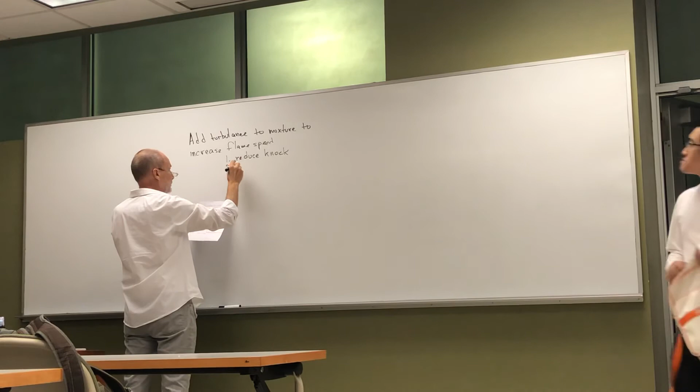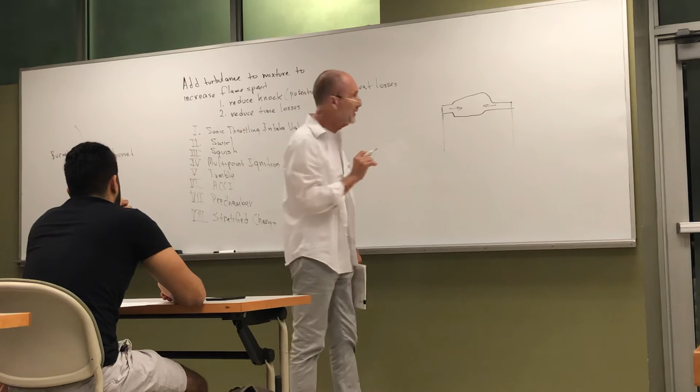This will be quantified, but right now, just in terms of the bulk gas motion, can you see that when a piston comes up and this space goes down to a very small volume, the gases that were here are forced into the main chamber. The rate of decrease in area here is going to be greater than the rate here. And so the gases are going to be forced from this space to that space, and that's squish. This area, here in the cylinder head, is the squish area.

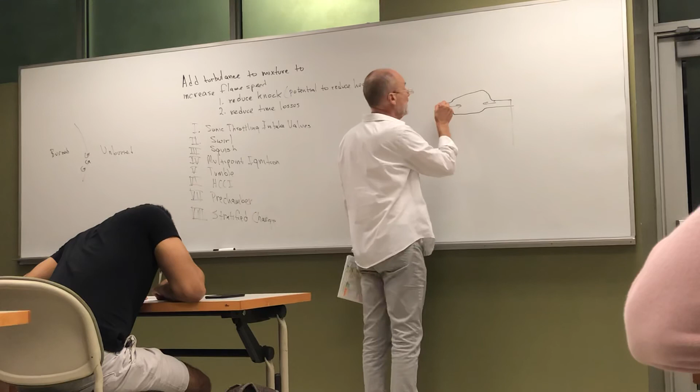And then the part in the middle, that's the main chamber. Pardon me? The part in the middle is the main chamber. Yeah. Once this is at top dead center, then we have the combustion chamber at top dead center. The piston moves up to this position, at top dead center. And this space is the clearance volume of the combustion chamber.

And the gases that were in here have to be forced into the main chamber, and that adds a lot of turbulence. How much turbulence we'll see later down the page, but you can see how forcing the gases from this position to this position, anytime we force gas motion in the chamber, we're going to introduce turbulence.

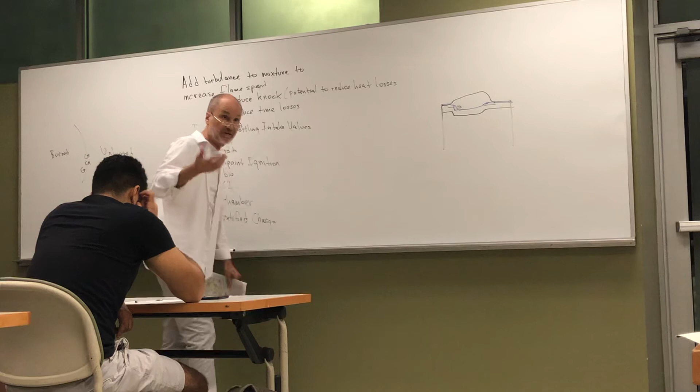So those two methods, squish and swirl, are completely dependent on what shape we have the combustion chamber, the cylinder head and the piston. As we vary the shape of the cylinder head and the piston, we can vary the swirl ratio and the squish tremendously. On the engine downstairs, we went from 0 squish to about 38% or so. And we went from a swirl ratio of about 0.5 to 3.

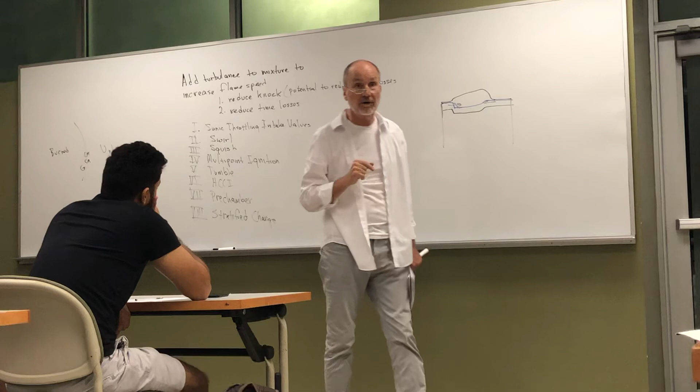How do you quantify that? Pardon me? How do you quantify squish? The squish is quantified by the area, the percentage of the piston that you cover. 39% squish area means that 39% of the piston is covered by the area that comes within 40 thousandths of an inch. The squish area is that area in which the piston and the cylinder head approach one another within typically the thickness of the head gasket, which is typically about 40 thousandths of an inch.

Okay, so 40 thousandths is the standard for squish? Well, typically, the piston comes all the way up to the top of the cylinder block, and this part of the cylinder head is machined flat because it's economically the easiest way to make the cylinder head. So you make up the squish distance by the thickness of the head gasket, and they are typically 40 thousandths of an inch, but you can get them, 120 thousandths. You can buy special order head gaskets at any thickness that you like.

You rarely see something under 20 thousandths. It gets more and more difficult as you make the head gasket thinner and thinner to make sure it seals, because it has to somehow take care of any irregularities in the two surfaces. And so it needs a relatively large percentage of its own thickness to make that difference.

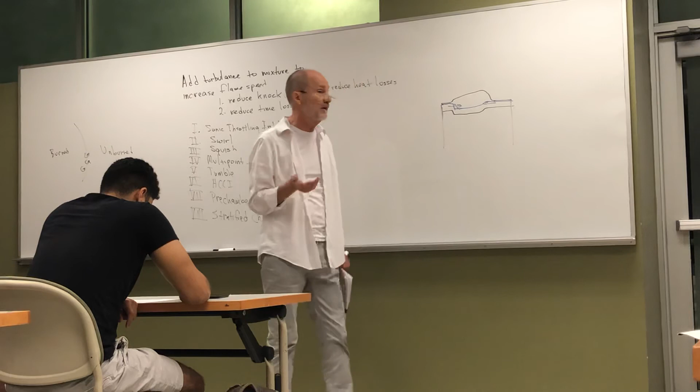What about like O-rings? Use O-rings, but they're very expensive. They're not used in production engines. High-performance engines use O-rings, diesel engines may use O-rings, but normal spark ignition engines, they're too expensive.

An O-ring just means that you put a groove in a cylinder block and you place either a metal or, in some instances, a non-metallic ring in there to seal. Then when the cylinder head bolts bolt the cylinder head to the block, you have a very small area to resist all that pressure, and you get very high pressures and a very good seal. But it's expensive, so it's not used.

So if you were able to pretty much have a port come straight out the top, that would be little to no swirl, and then the more cross flow is. Exactly. As we look at the cylinder block from the side, here's the intake. The farther it's laid down in this direction, the more swirl we're going to get.

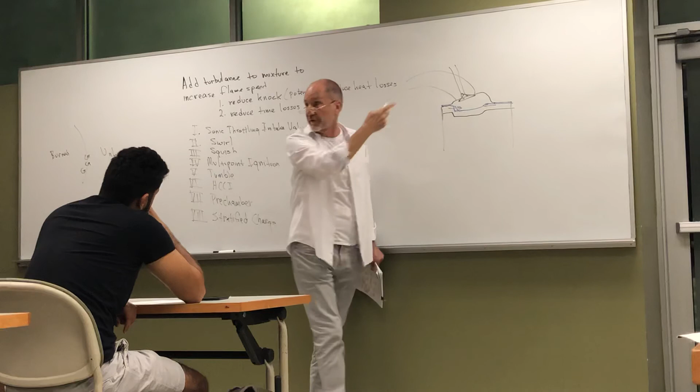Now, what we did with the engines downstairs is, as you look at the combustion chamber from the top, here's the intake valve. We have the port come in like this, and then this side of the combustion chamber goes down. The valve is recessed up into the cylinder head, but the combustion chamber goes all the way down to the squish area on this side, so you prevent the gases from going to that side. When the intake valve's open, they're blocked by part of the combustion chamber. And that's how we got such a high swirl ratio, and how we were able to eventually run lean enough to meet emissions without a catalyst.

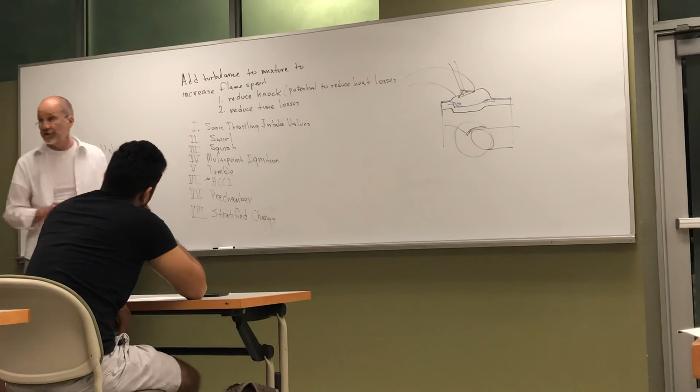And that's one of the goals here, certainly possible with homogeneous charge compression ignition, but for decades, ever since the 1970s when they started to use catalysts, the intent is to find some way to run lean enough so that you don't have to use a catalyst most of the time, entirely over the federal driving cycle. Are you virtually reducing the displacement by adding so much squish, or only increasing the displacement?

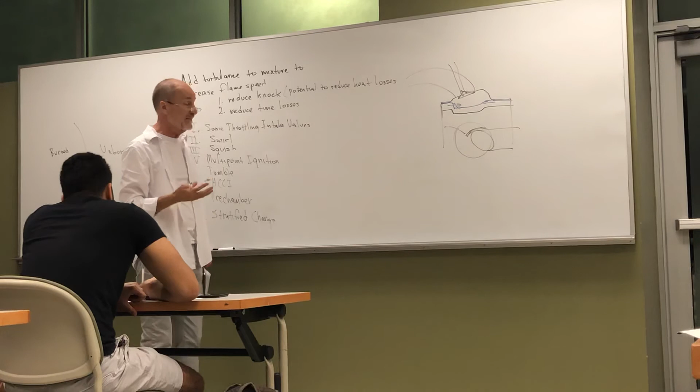The displacement is only a function of the bore of the cylinder and the stroke. So you're increasing compression ratio, that's what it is. Yeah. And then you have to remove a little metal someplace else if you want the same compression ratio, which is what we ended up doing. So you end up with a taller chamber and then narrower. It depends entirely. You can sink the whole chamber into the head if you want to. It depends on where the metal exists in the existing head. If you're casting your own head, then you're free to put it wherever you want to.

Where else is it usually removed from if you're not making it taller, if you want to lower the compression ratio? Yeah, it's going to keep the same compression ratio, but add squish. You have to look at the particular engine to see if there's metal. If it's a true hemispherical combustion chamber, there's really no metal available to add squish. In our case, we started out with a chamber that had a reasonable amount of squish, and then we machined it all the way to the zero squish situation. And then we ended up with the final chamber, we were adding it by cutting the thickness of the cylinder head. And this is at an angle here, so when you plane the head, these distances get thicker.

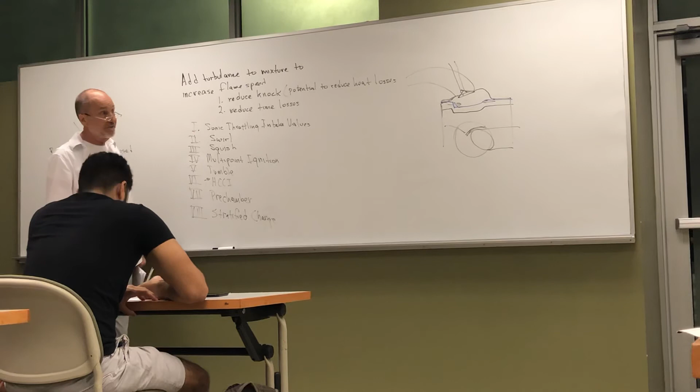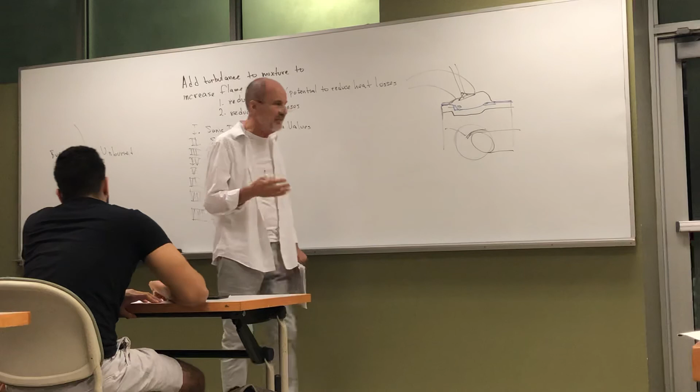But there's a limit with a given casting as to what you can do. That's why we ended up with a Mazda cylinder block and a Kia cylinder head, because there weren't any Mazdas that we could find that had metal in enough of the right spots where we could do machine work only without welding. And welding becomes very cumbersome. Heads change shape when you weld. Whenever you put a large amount of aluminum welded into a spot, as it cools, it shrinks and pulls all the metal around it and warps everything. So you'd rather try to pick some block of aluminum to make a cylinder head out of that you don't have to weld.

What is STD and SW, and then SQ and SWQ? STD is standard, SQ is squish, SWQ is swirl and squish, SW is swirl. It's just their nomenclature. If you look on the right-hand side, you can see a table that lists the 4 cylinder heads they tested. At the top of the table, it says combustion chamber type. That's the type of cylinder head. It says STD is standard, swirl, squish, and then below that is swirl and squish. And those are the 4 heads, and the swirl ratio given for each one.

The standard head had a 0.7 swirl ratio. The high swirl was twice that amount of swirl at 1.4. And that's a ratio of, when you measure it on a flow bench, the bulk gas motion down to the tangential gas motion due to the swirl out at the end of the combustion chamber. That's the ratio of those 2 velocities. How would you measure those?

With the swirl meter in a flow bench. The flow bench automatically gives you the flow rate, you know the cross-sectional area of the cylinder bore, so you know the bulk velocity down, and the swirl meter rotates with the speed of the swirl, and you use a strobe to measure how fast it's rotating, so that you're not doing something that slows it down.

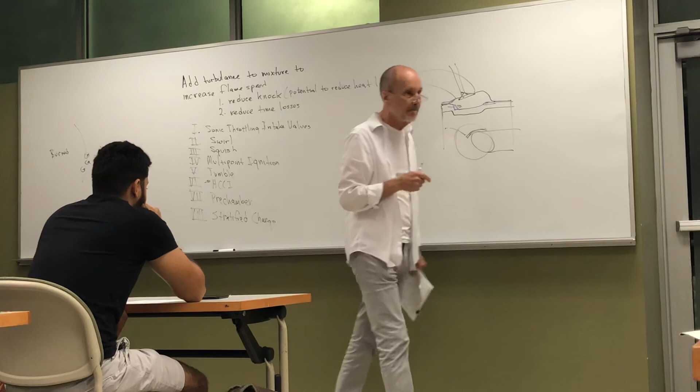So what geometry introduces more swirl? In this case, the more they lay this port down, the more swirl they get. And that's, in general, the approach that's taken.

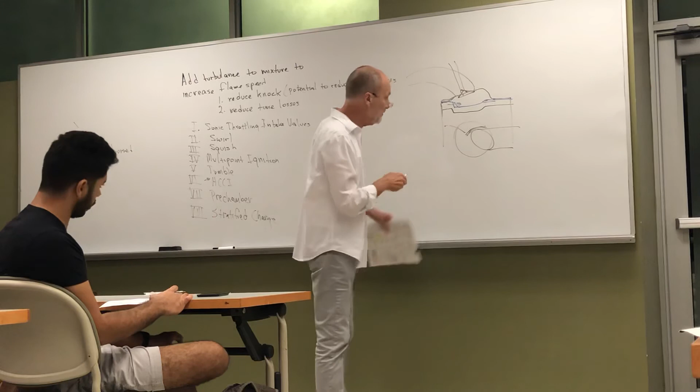I have a question. In the top, we have the two different combustion chambers in which we add squish. Do you change the heart-shaped chambers just for squish, or is that for swirl? Well, this is a schematic. What they've done is the heart-shaped chamber, if you have a piston like this and your chamber is shaped like this, then this is all squish area. This is machined out flat with the head gasket surface. But in the top, they're just dealing with a schematic and they're showing the squish.

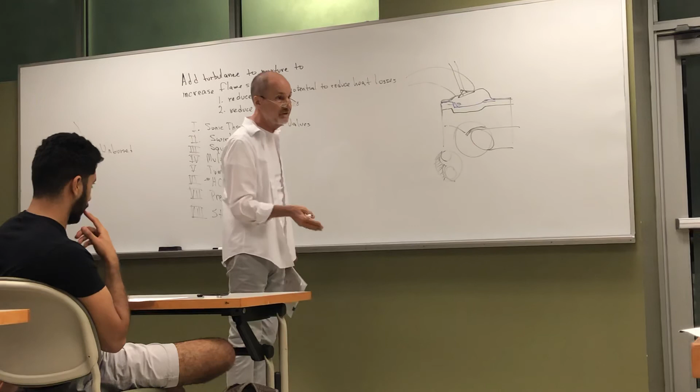Why would you shape it like that rather than flat? Because you've got two valves here. And you just do that to increase squish? You're making room for the valve. If you put the wall of the combustion chamber right next to the valve, you prevent any flow as it opens. So that's what we did on purpose to induce swirl. But you want to back this off far enough if you don't want to reduce the volumetric efficiency. So you have to keep this far enough back so it doesn't shroud the intake valve or the exhaust.

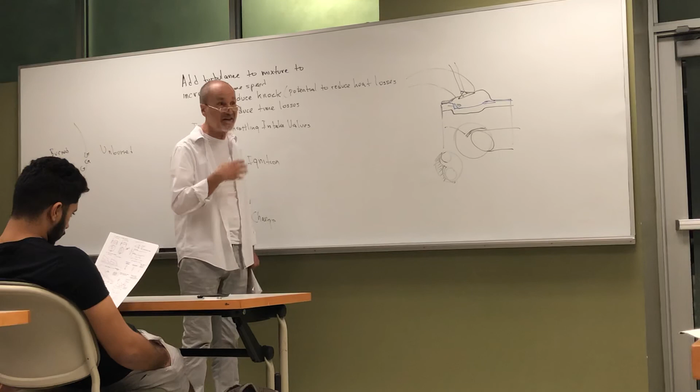And then in the upper right-hand corner, we've got swirl ratio versus airflow. They were able to get approximately the same swirl ratio in all airflows. That's a desirable attribute. You don't want to have very high swirl at high lifts and nothing at low lifts, because the last gases to enter the cylinder are at low lifts, and that puts the gases that have low turbulence near the spark plug, because it's the last gases that enter the combustion chamber after compression that end up near the spark plug. So you'd like to have a relatively constant swirl.

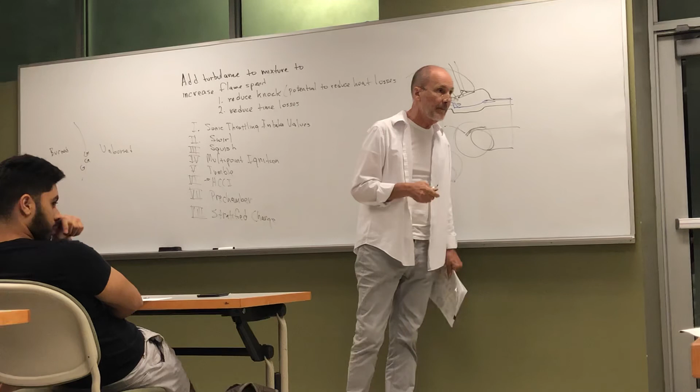That means that the gases also are going to lose less kinetic energy internally, trying to transfer from a high swirl area to a low swirl area. So you can maintain the swirl longer. Remember, you create the swirl on the intake stroke, and then it has to maintain gas velocity all the way through the compression stroke until you ignite it. So you want to develop a bulk flow that doesn't inherently slow down because of turbulence due to combustion chamber and piston top. So is swirl like angular velocity, is that how it's quantified?

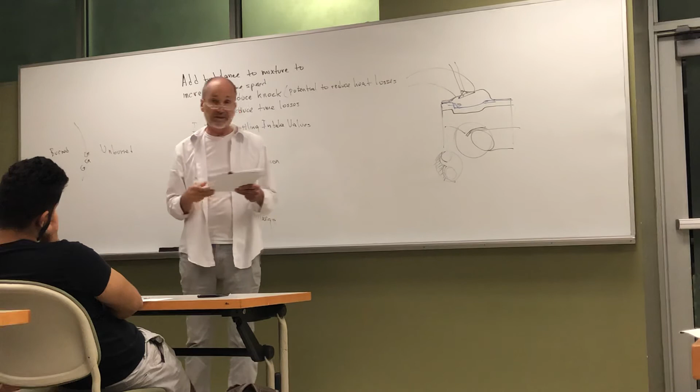Yeah, no. Swirl is the amount of rotation around the center line of the cylinder. But it's amount of rotation as in like angular velocity? Well, it's the ratio of the gas velocity down to the gas velocity out near the cylinder wall, assuming bulk flow. That's what these ratios are. Okay? That covers about the top of the handout. Is there anything on the upper half of the page of the handout that is mysterious?

Absolutely. You mentioned that you want uniform swirl at different lifts, and you're measuring swirl against flow rate. Are they increasing flow rate by increasing lift? If you get it with flow rate, you've got it versus lift. Okay. If you don't have it versus lift, it's not going to be this flat. What they're doing here is changing the flow rate. But all the data is taken at just one lift on the page. But this is just a demonstration of how well they did their job, basically.

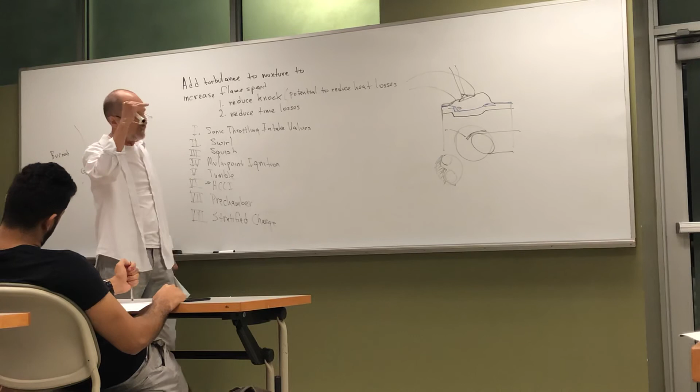If it's not relatively constant during the intake stroke itself, you'll end up with peaks in this curve. If you just go in and start to make modifications that add swirl, kind of willy-nilly, you're not going to get a nice flat curve like this. And all they're doing is showing here that the swirl that they generated is likely to retain its velocity all the way through to ignition, and the data eventually shows that.

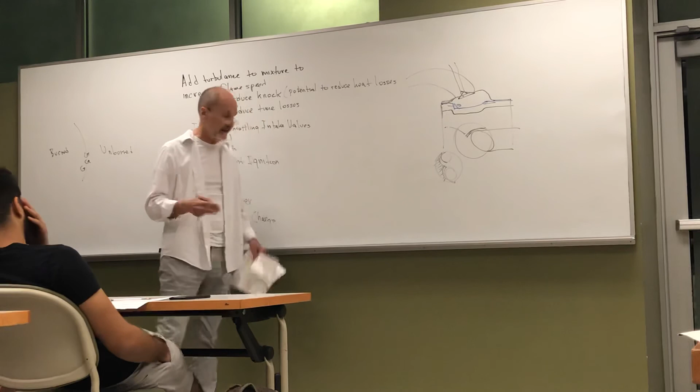How would you encourage constant swirl? Well, it depends on how you're making it. Are you shrouding the intake valve? Are you just using a swirl port where the port itself is offset?

There are a number of different ways to add swirl, and it would depend on which one of those you chose, and eventually you show it at the flow bench. But how would you encourage constant swirl? It depends on which method you're using to develop the swirl. Could you name those? Well, as I said, you shroud the intake valve.

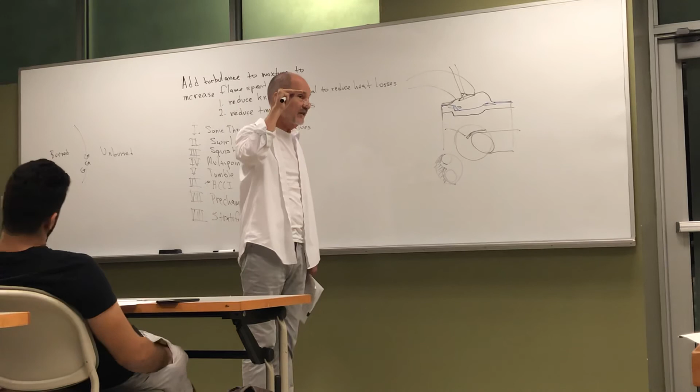In that case, if the lift is such that you pass the shroud, you have to be very careful that you don't lose a lot of swirl in the process. Can you envision what I'm talking about? The shroud is the combustion chamber. It's what we were talking about here. You can, which is what we did in the engines downstairs. As the intake valve lifts, you have combustion chamber in the way on one side of the valve to prevent flow from that side, and so you're producing swirl.

If you can maintain that same amount of shrouding throughout the entire lift of the intake valve, which depends on how high you want to lift it, you can get very consistent values. If you're doing it with an offset intake port, then you just have to vary the height of the valve pocket until you get a good value that's the same all the way across the board, because at the higher flow rates, the flow field itself is going to change.

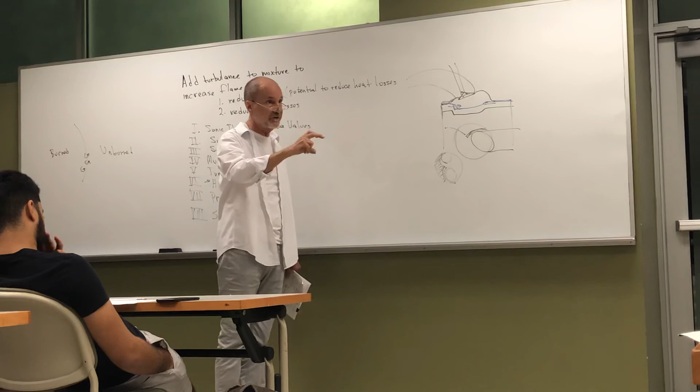You can do it with shrouds on the intake valve too, but then you have to prevent the intake valve from rotating. Normally in all engines, intake valves rotate so you get even wear on a seat. If you're going to put a shroud on one side of the valve, you have to pin the intake valve so it doesn't rotate.

I think you had a question first. Mine's like, you have SQ and SWQ and standard and squish. So what is SWQ? Is that squish and swirl? Right. If SW is swirl and SQ is squish, and one of them has squish and swirl, it's still SWQ. You might have already explained this, but I'm still kind of confused. What exactly about angling the intake port downwards like that causes more swirl?

I'm going to look at the side here. Let's say I have an intake port like this, and I have a valve that's long enough to allow me to do it. I'm not going to have much tangential motion in this direction, because it's coming straight down. If I lay this port down, it's coming in like this, which is more momentum I'm going to have available to create swirl. Principally, a good swirl engine is going to have a much lower intake port than one that's designed for volumetric efficiency.

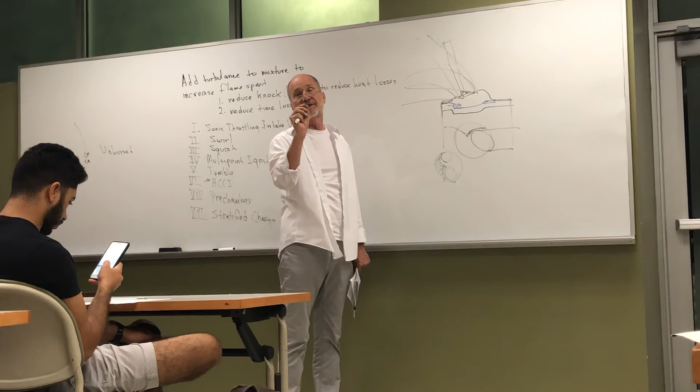And in general, if all you want is power, you want to get rid of the swirl. The cylinder head that one of my graduate students is working with for the 400 horsepower Miata engine comes with quite a bit of tumble. It flows 211 CFM with a little bump on the intake port and a short side radius here that is smaller than 2 millimeters. You take that off and it goes up to about 240 cubic feet per minute. And the power is linearly related to the flow rate.

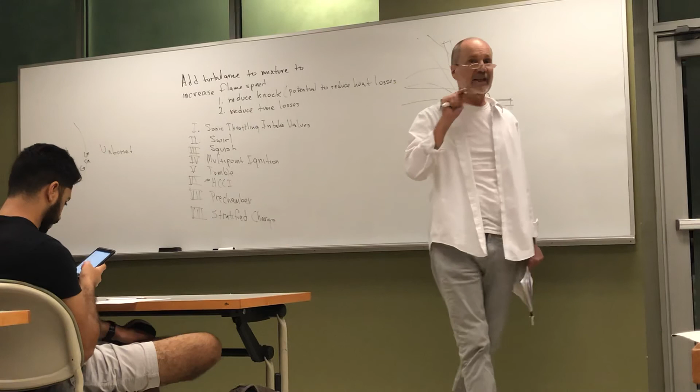What are these two things? Can you re-explain these? Those go with these to show a schematic for squish. You know what squish is? Yeah. Okay, those two together are the schematic that they're using to represent squish.

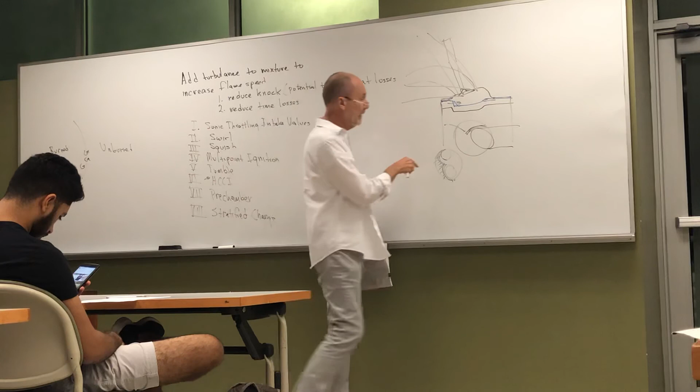When you add squish, if you have a hemispherical combustion chamber, you can't have any squish if you have a flat top piston. A typical method for maximizing squish is to end up with this shaped combustion chamber, so that you put as much squish area in as possible. And they've chosen that as the chamber that they're going to call the squish. Oh, so this is like a raised portion. This surface is rotated 90 degrees and sits here. And then, if we've got valves here, we can actually have metal come in this far and still be squish.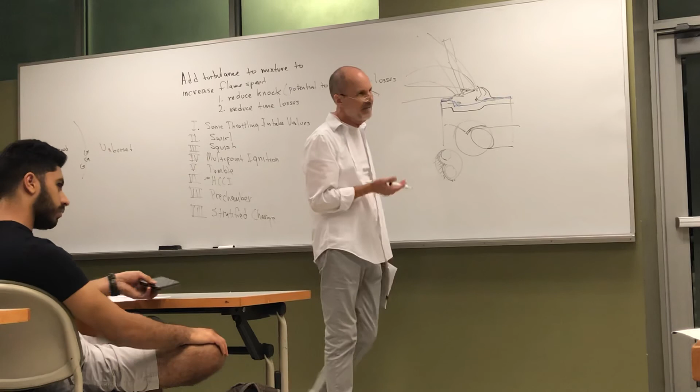Couldn't we have squish with a hemispherical engine if your piston is bigger than the chamber? The piston has to go up into the chamber. No, if your piston's bigger than the chamber, then it gets... The purpose for a Hemi is to put a lot of valve in the chamber, so you want to use up the full diameter of the piston to put the valves in the chamber. So hemispherical combustion chambers typically have little or no squish at all.

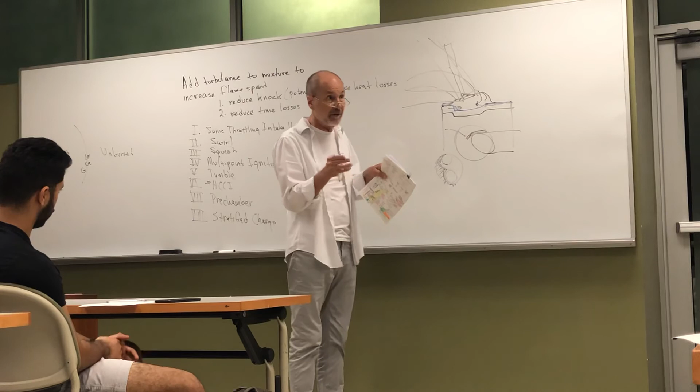They are a slice out of a sphere, and it fits directly on the top of the bore. And that's a hemispherical combustion chamber. You can pinch the sides of the chamber, as Chrysler did eventually with the Hemi that they're making, but it's no longer really a Hemi. Well, their Hemi was never really a Hemi, but they have the name, they have the reputation, people want to buy a Hemi, and so they kept it, but that's all marketing. It's sort of a Hemi in that the two valve stems are not parallel.

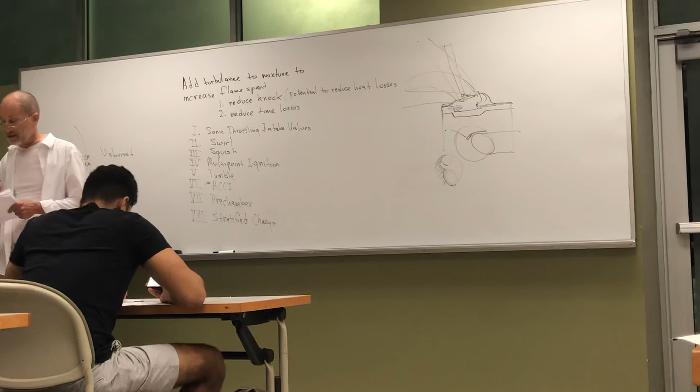And the shape, like the size or the angle? This heart shape is the classic shape you end up with when you're trying to add squish to a two-valve engine and maximize the squish, because all of this area is squish area. So the more the area, the more squish. If you say you have 40% squish area, that means 40% of the top of the piston is covered by that very small gap at top dead center.

Which side would you prefer to put the squish area if you wanted maximum turbulence? Would you want it on the opposite side from the port? Well, you typically put it, if the port comes in like this, you put it on this side so you don't affect the volumetric efficiency. If we put it over here, we shroud the side of the valve that flows the most gas. So we're going to put it on this side typically, but it's a strong function of where you're going to put the spark plug. Because if you have one spark plug, that dictates where the flame is initiated.

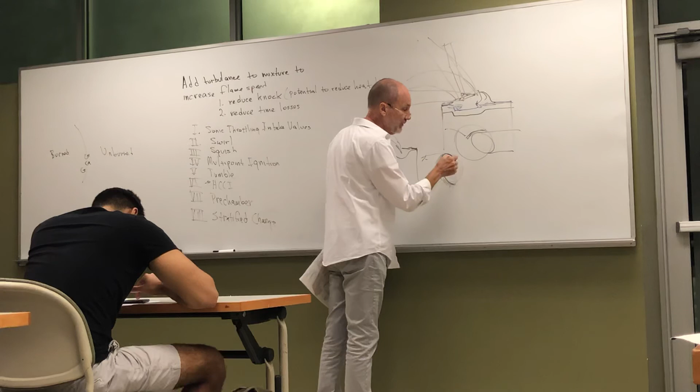And in a classic case, when you're trying to maximize squish area, and we have gases flowing in from an intake port like this, we're going to put as much area as we can here, because if we inhibit the flow on this side of the valve, it's not as detrimental to airflow as on this side of the valve. And then the spark plug is going to be over here somewhere. It depends on whether it's a cross flow head, with the exhaust out this side or this side, but I'm assuming it's not a cross flow head.

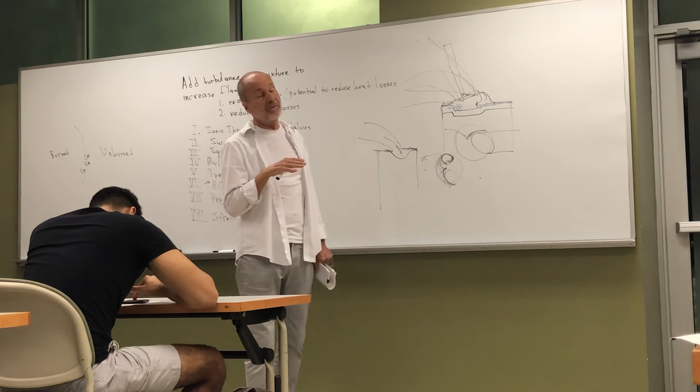When you're designing a cylinder head for better swirl, you're also reducing the volumetric efficiency, right? Absolutely. So you're making less power because you have less air, but you're making up for some portion of it by using swirl. So you end up having less power but better efficiency? Yeah, you typically end up with less power and more efficiency. In the last iteration of the engine downstairs, we went from a 1 1/4 inch intake valve to a 1 1/2, so that we got all the power back. But now you have to pay for a valve that's a 1/4 inch bigger in diameter, and you have to have room in the combustion chamber for it, which we found in this case. It also allowed us to have virgin metal to cut for that shrouded portion.

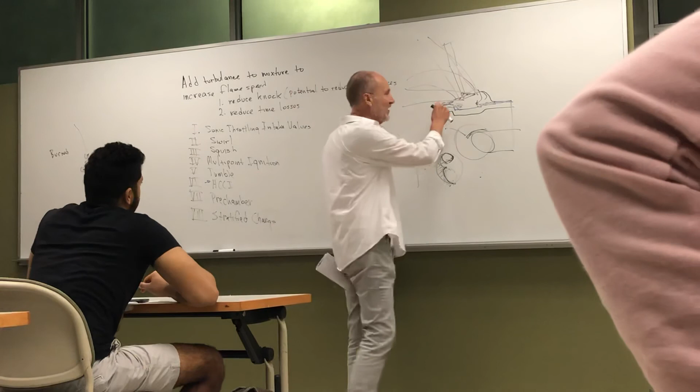Is there an upper limit to squish area that's been found? Well, it can't go above 100%. I meant like 40, 50. You could design 100% if you wanted to, but you'd have a compression ratio so high that the entire height of the combustion chamber is 40 thousandths of an inch. So your stroke would have to be 4/10 of an inch for a 10-to-1 compression ratio. So there are sort of upper limits, but realistically, 40% is a monster number.

And we've got high 30s in the last engine we built to extend the lean limit down to where we can meet emissions. And then we had to put in a bigger intake valve because we'd added so much swirl that we lost so much volumetric efficiency that the power was way down.

By putting the squish on the side that you said wouldn't be beneficial, you would probably produce more turbulence, because it's pretty much a function, as you'll see at the bottom of the page, of the squish area. The gas velocities are... what we ended up doing, we put it in every spot we could find.

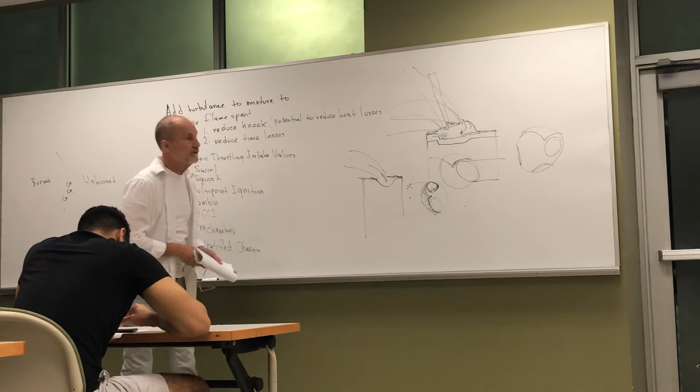Here's the combustion chamber, we had an area like this, here's the intake valve, we had another little bit over here, another little bit over here, wherever we could put it in. And the exhaust is here, and the spark plug is located about here, in the best chamber that we had for the generator engines.

That started as an automobile engine; put it in a car, and it would just blow up. You change enough of the design considerations to where it's no longer at all usable for an automobile. As I said, if you just use it as an automobile's generator engine, it only delivered 29.4% thermal efficiency. After it's modified to specifically be used as a generator engine, it was 37.5, and it didn't cost any more. We could have rebuilt it as an automobile engine for about the same $1,500 it cost to rebuild it as a generator engine. Once it's designed as a generator engine, it no longer can function as an automobile engine.

Is this because you don't pass a certain RPM, or why couldn't you use it as an automobile? Well, the RPM limit, that's one limit. We went up to 12.7:1 compression ratio, knock is another limit. We use smaller journal bearings to reduce friction because we're only at 1,800 RPM; they would tear up at higher RPM. We used lighter valve springs, because there's only 1,800, so all the valves would float at higher RPM. If you could use it on an automobile below 1,800 RPM, it would be fine.

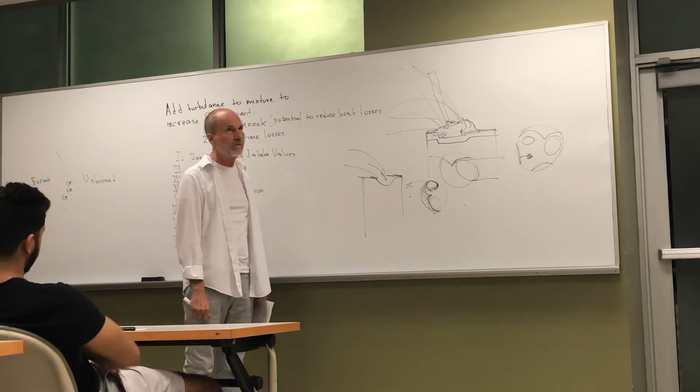No, not at 12 to 1, not with normal gasoline. You could use it with E85, though the spark could be all wrong. You could find some condition that's just like the generator, 1,800 RPM cruise, but you're going to need a fuel with as high an octane number as propane. And to do that, you'd have to be down at a few stations that sell E85.

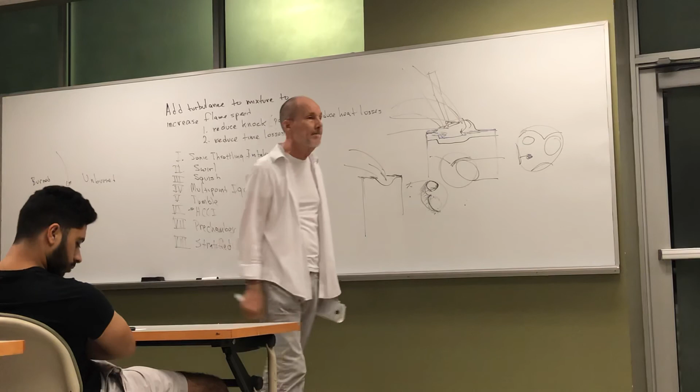Now, by increasing the squish area, obviously you have more edges. Does that affect the hot spots? With either cast iron or aluminum head, it's not particularly a problem. You get a hot spot when you leave a sharp corner. The piston comes to a corner like that, now it can get hot. But as long as you don't leave sharp corners in the combustion chamber, even with cast iron, you really don't have a problem. You can have a problem near the exhaust seat, but that's because during the exhaust process,

during the initial blowdown process, there's a huge amount of heat transfer. The gases are passing that area at the speed of sound, with a very high heat transfer coefficient, and they're at their hottest temperature. After blowdown, the gases in the cylinder are at a lower temperature, because they did all the work to force the other gases out at the speed of sound. When you have heat problems like that, and the wrong design spark plug, it's just a little wire that hangs out of the chamber, it can overheat. Even the ground electrode can overheat. But the spark plug components are highly insulated parts.

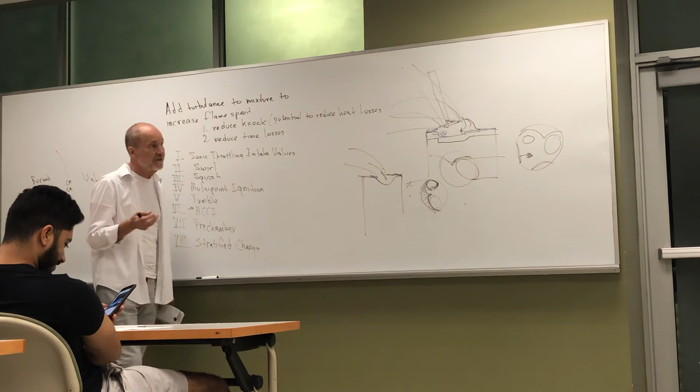And the exhaust valve experiences heat transfer way above any place else in the chamber. It's always the hottest general area in the chamber. You can find spots in the spark plug that may be a little bit hotter, but the exhaust valve is going to be hundreds of degrees hotter than the rest of the chamber. The actual metal in the chamber maybe goes to 350 degrees. The intake valve could possibly get there, and the exhaust valve easily goes 1,400 degrees. As I said, if you put a window in the exhaust and look at it during operation, as you go to high load, the valve begins to glow, turns orange. That's still not going to melt for another 1,000 degrees Fahrenheit, but it's quite hot.

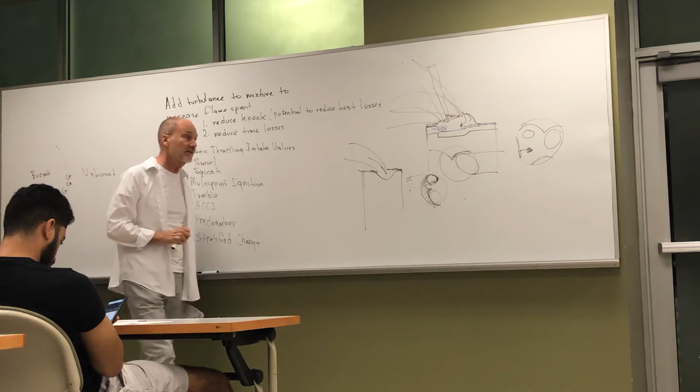What would you say are the main pros and cons of increasing squish area? The main pros and cons? Right. Well, what we're doing here is increasing the turbulence. So all of the positive effects of increasing flame speed exist. You have all the negative effects of increasing flame speed, which is heat losses, exist. So it's everything that is normally in the course.

I thought you reduced heat loss. Are there like mechanical? I mean, I thought you reduced heat loss.

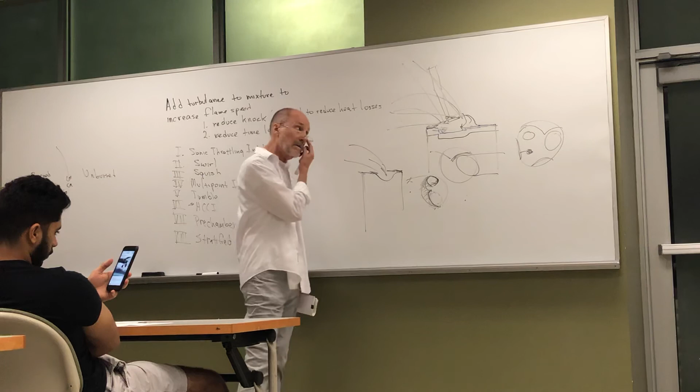Would an engine with a smaller stroke also have a higher swirl ratio typically? A higher swirl ratio, if you have a shorter stroke? No, it's typically how you've designed the delivery of the gases to the chamber, which is the intake port and the combustion chamber around the intake port, and to what degree you've shrouded valves. That's what produces a given amount of momentum that can be used to produce rotation. It's not particularly a function of the cylinder themselves.

Wait, but you said it's a ratio of the tangential velocity to the vertical velocity, right? Yeah, but you have a given amount of momentum, so it slows down when you spread it out over a larger diameter. Did you just say when you increase flame speed, you increase heat losses? Pardon me? Whenever you increase turbulence, you increase the heat transfer coefficient between the gases and the metal, and you get more heat losses. Which is what we'll see as we go to the next page in a handout.

So then reducing knock, is that a potential to reduce heat losses? Well, if you have a way to reduce knock, you can better insulate the combustion chamber and reduce the heat transfer, because you don't have to worry about overheating the unburned gases and producing knock. So that's not a direct correlation with increasing flame speed? Well, if you take advantage of the knock reduction, then it is.

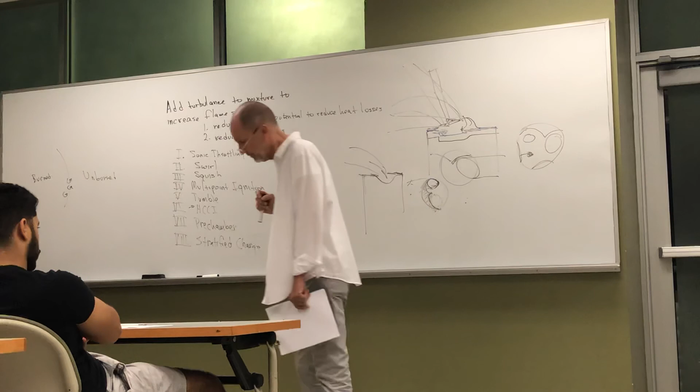So would you change the geometry of the combustion chamber to do that? Well, there are a number of coatings available that companies advertise do the job. By the end of next semester, we'll have some of our own data to see. It's kind of questionable. Ryan and I have been looking at it, and it would appear that what they've got should be. But time will tell. We're setting up an apparatus to where we can look at heat transfer in the exhaust port, and if they work in the exhaust port, they probably work in the combustion chamber, but that would be another project. Okay.

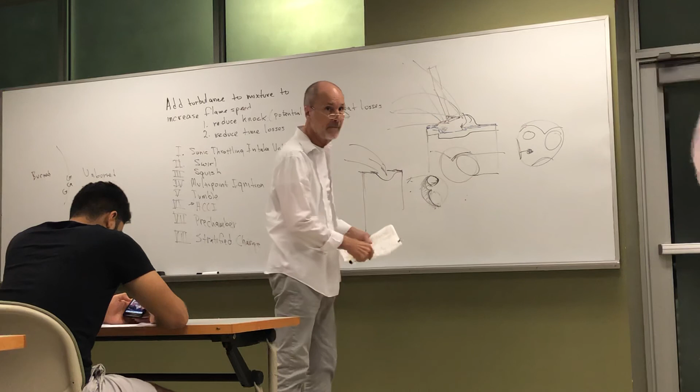So, you mentioned the squish area too, but like that depth between the, like that little, not that one. Yeah, but just that one portion in the actual piston head, like that dip. Yes? Yeah, how do you determine how high you want that to be, or how deep you want it to be?

Of course, there's a given volume you have to get, whatever compression ratio you want. Yeah, and that's the principal determining factor. The more of the combustion chamber you put in the piston, the higher the heat load on the piston. So the higher the performance of the engine, the less you want an actual dish in the piston, and all of our engines downstairs just have flat pistons. That's the minimum surface area, and we design the rest of it around the flat-top piston.

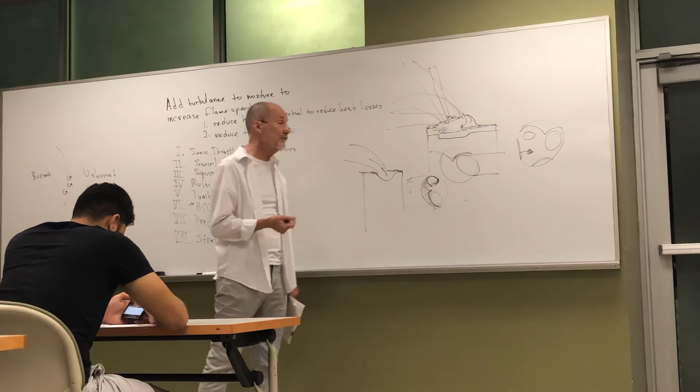Does squish have an effect on the exhaust stroke? In what way? Does it improve the exhaust? Not in any noticeable fashion, no. The gas velocities are important because of the small-scale turbulence that they produce, but they don't show up in terms of improving the scavenging or hurting the scavenging.

So the data on the right-hand side and the top left, all on the left-hand side, and everything on the top right-hand side explains the behavior we see at the bottom quadrant of the handout. We see two plots here. We see minimum best torque spark advance there at 30 to 40, 50, or 60 degrees before top dead center. And we see air-fuel ratio. 15 to 1 is about stoichiometric, a little bit leaner than stoichiometric, and we go all the way out to 19 to 1, which is very lean.

And we can see the standard cylinder head requires the most spark advance. And if we look down at the bottom, we can see the standard cylinder head is the least efficient. It has the highest brake-specific fuel consumption versus air-fuel ratio. The little symbols that look like this, the line with this, that's the lean limit of combustion. You cannot ignite the mixture when you've leaned it out that far. And you'll see as we add turbulence, the lean limit of combustion moves to leaner fuel-air ratios.

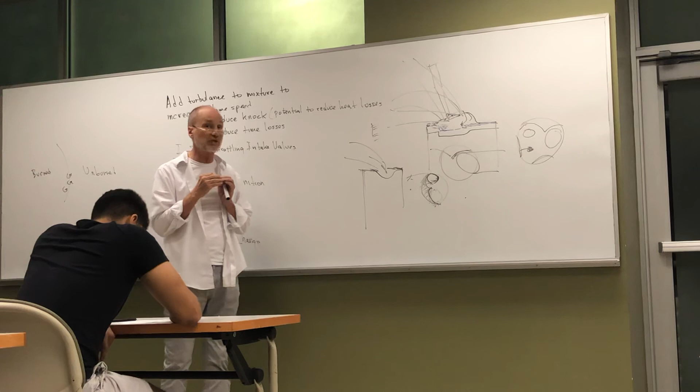What's MBT again? Minimum best torque spark advance. Remember, if you pick exactly the right spark advance to produce the most torque, you can retard that generally noticeably and reduce the likelihood of knock without losing much torque. So they accept maybe a 1% or 2% loss of torque, and they retard the spark from the absolute best efficiency spark advance. And that's minimum best torque spark advance.

We can see here adding swirl and squish requires the least amount of spark advance, which means that the time losses are minimized, and that produces the best thermal efficiency as we look at the bottom. The same symbols are used in the two figures on the lower right-hand side, at the top and the bottom. Squish only doesn't reduce time losses as much as swirl for this particular combination of squish and swirl. If we look at the bottom, we can see the trend changes at about 16.7 to 1. If you're richer than 16.7 to 1, you're better off with squish, but if you're leaner, you're better off with swirl.

It should be obvious from the data on the rest of the page why you'd expect a transition like that. It's a function of when you add the turbulence. With swirl, you add it early in the cycle, and then it decreases. With squish, you add it very near top dead center. So if you already have a relatively high flame speed so that you don't have ignition problems, you can add squish and get a further improvement in efficiency. But if you've gotten so lean that you're having ignition problems, the leaner the mixture, the earlier you're going to ignite it and the more intense the swirl. So for the very lean mixture, swirl is favorable. That's why they cross. They're going to have to cross somewhere. It happens for this combination of swirl and squish that the cross occurs at 16.7.

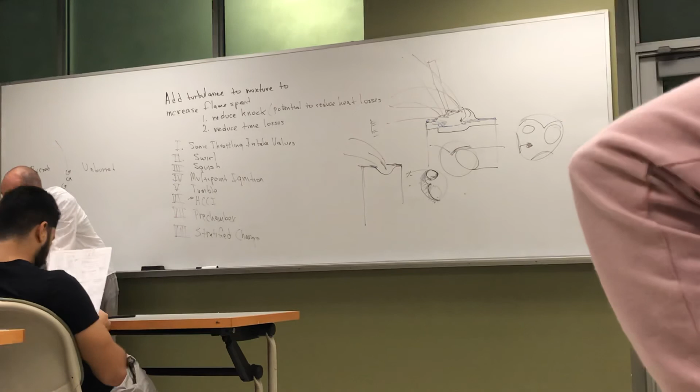So that's squish and swirl. The curves that are dotted there are the squish intensities only. You can see the one marked SW and standard. That's from the tail of the figure above it, between 30 and 50 degrees before top dead center. That's just a duplication of the data above it. And to get the total gas velocities, you'd have to add the swirl and the squish together.

Can you re-explain the intersection with the BSFC and the air-fuel ratio? Yeah. If you see that, what is the spark advance for these lean mixtures? And here it's 17 to 1. What type of spark advance with either swirl or squish is being utilized at 17 to 1? We're anywhere between 40 to 45 degrees before top dead center.

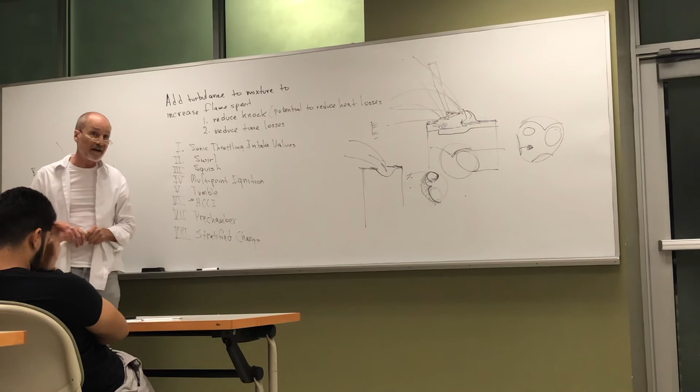Now, if you look at the figure on the lower left-hand side, in between 40 and 45 degrees top dead center, squish really hasn't added much turbulence yet. Some, but not a lot. Consequently, you're not going to expect a really big result. But the swirl has added even more turbulence than it adds at 30 degrees before top dead center. So it's definitely more useful for the higher spark advances, and that's what you're going to require for the leaner mixtures, which burn slower.

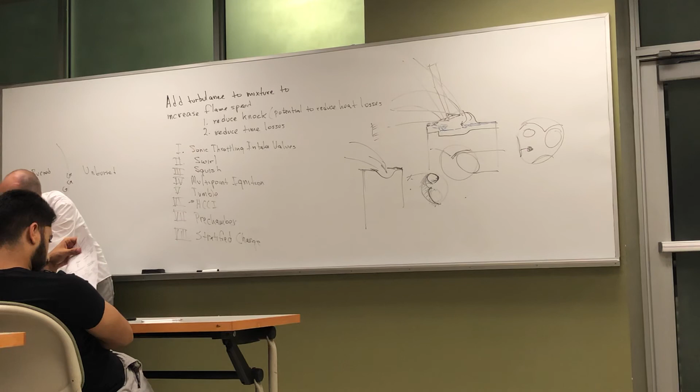So the dotted line on the bottom left that says SW, that's a duplication of the data for the figure just above it that's called SW for the dotted line. And the one marked standard is a duplication of the data just above it from the far right-hand side. And you would add onto those velocities the squish velocities to find the total squish. And what's shown in the figure in the very lower left-hand corner is the squish velocity, how much you would add.

Yes? Would swirl be more beneficial at higher RPMs, because at a lower RPM it has time to slow down, since you close the intake valve and then it cuts off? Well, yes, at higher RPM, the squish velocities go up dramatically. So it really depends on the fuel-air ratio that you're talking about. And the squish is still useful at very lean mixtures. You can see that compared to the standard on the figure in the lower left-hand corner, but not nearly as useful as the swirl. And the swirl is going to tend to be more useful for lean mixtures where you're going to be igniting it a much greater distance before top dead center, whereas the squish is going to be most useful when it's most intense, which is much nearer top dead center.

So if you have a rich mixture, you're not going to use nearly as much spark advance. You can see that in the figure. Even the standard is only about 45 degrees before top dead center for the spark advance, if you're talking about 15 to 1. It's increased to over 60 degrees if you're talking about near the lean limit at leaner than 17 to 1.

So when you say more intense, what do you mean for squish? You said squish is preferring more intense. Squish is going to be more useful if you have richer mixtures. Swirl is more useful for lean, as you can see depicted in the lower right-hand corner here. You can see the best brake-specific fuel consumption when you compare swirl and squish occurs with the swirl for the lean mixtures and the squish for the rich mixtures, and the crossover occurs at about 16.7 to 1, which is, for a conventional engine without a lot of modification, about as lean as you want to run normally.

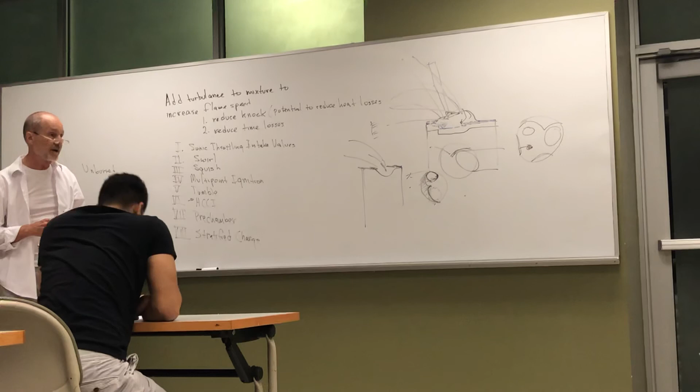What's the vertical bar here? I know you talked about it. Yeah, that's the lean limit of combustion. This symbol means that if you go leaner than that, which is to the right on your figure, you can't ignite it. It's no longer ignitable. Adding turbulence, to an extent, extends the lean limit of combustion. You can run a leaner mixture after you've added turbulence.

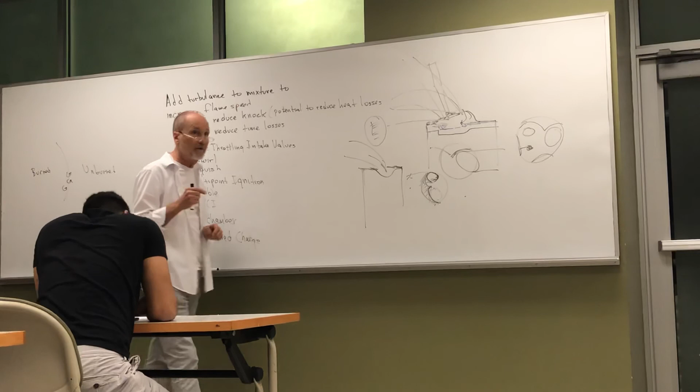Why? As long as you don't add so much turbulence that you put the original flame kernel out, you make it grow faster. But it's just like blowing a match out. If you overdo it, you get to where, when the spark is ignited, there's a little ball of flame that's created by a little ball of hot gases that are way hotter than they'll ever get in combustion. The electric arc is at temperatures much, much higher than the temperatures reached in combustion. So you end up with a little sphere of burning gases.

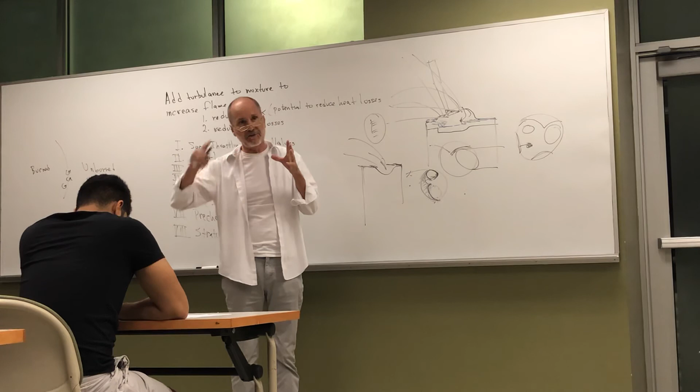And then the ignitability is determined by how rapidly that can increase in diameter. The more rapidly it can grow, the more repeatable the growth will be. And if it's not very repeatable, if one time it grows slowly, and the next time the engine rotates twice, it grows rapidly, that hurts efficiency a lot.

Okay, are there any questions there on this? Okay, well, that's some of the behavior of swirl and squish.

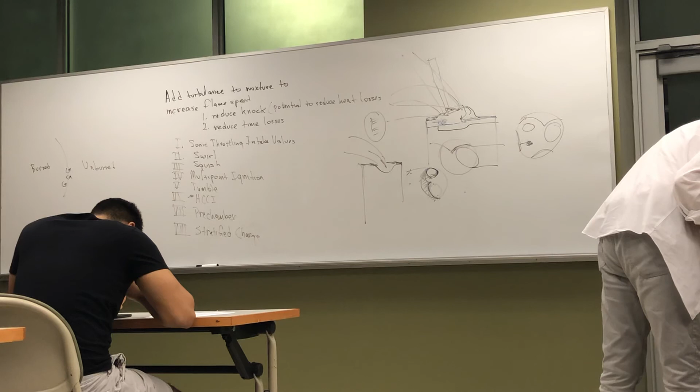This is a duplication right here. They just replotted it for you. And having discussed swirl a bit, we're now going to compare multiple ignition sites to swirl. Remember, as we add swirl, we can burn the mixture more quickly, which reduces time losses, but we're going to increase heat losses.

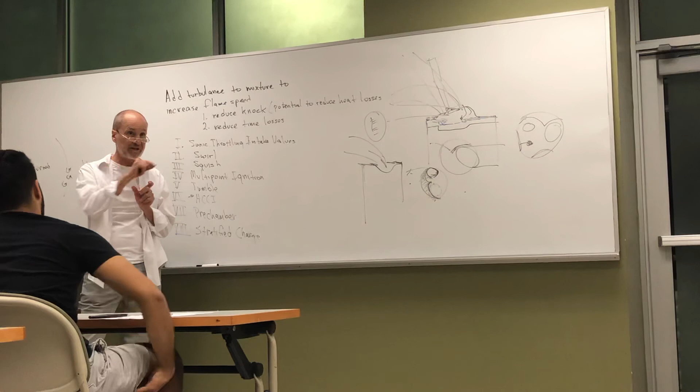Does one spark plug have multiple gaps? What do you mean by that? What they've got is a piece of metal with a porcelain electrode around it, and then at the top they have an electrode that looks like that. The one next to it looks like this, with porcelain to insulate it, and the gaps in between here and here. Then they have another one here. And so now we've got 2 gaps. And they continue until they got 6 gaps.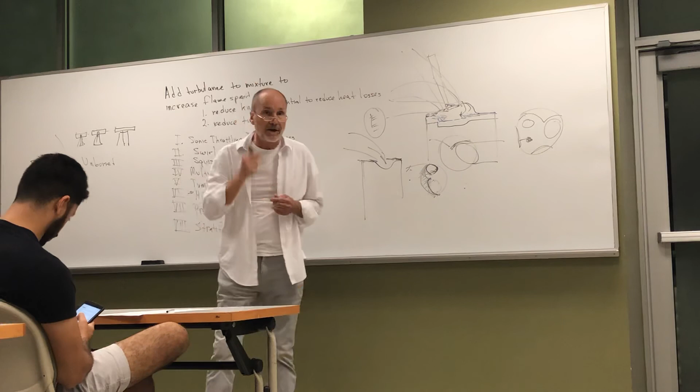Are they all connected to the same coil for a cylinder? Yeah, when they connected them all, each side to the same coil, the voltage required is what you see in the upper right-hand corner. Because there's interest in how much we're going to have to increase the cost of the ignition system. Well, that's a function of how much voltage we need to gap the plugs. And now with the 6 gaps, we've got in the neighborhood of twice as much voltage necessary.

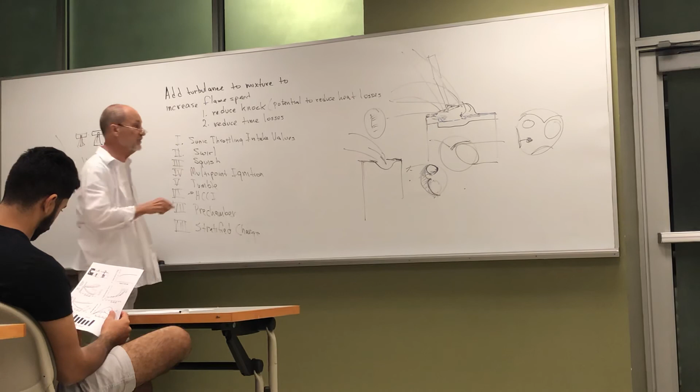On the right-hand side, we can see the engine running with a variety of configurations. Now, they're using a schematic to indicate how many spark plugs are actually firing. Here's the combustion chamber. Remember, there's 6 sites here and 6 sites here available for them to fire. They can short some of them out so that they don't fire. And this means that 4 of them are firing in the 4 corners. This would be 4 of them on one side firing. But you can tell from the schematic how many of the plugs are firing and what their location is.

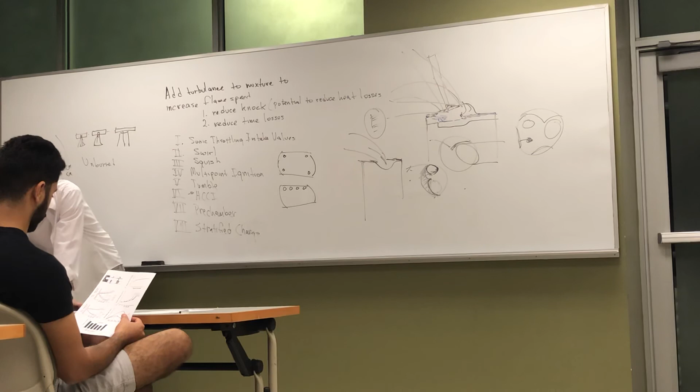And the schematic is shown there next to the brake-specific fuel consumption curves. And then above that, once again, is the spark timing. And we can see with one spark plug, we need the largest amount of spark advance. And then as we increase the number of plugs to 2, to 4, to 6, and finally 12, the amount of spark advance decreases.

When do they ever use that many spark plugs? This is just a prototype engine to see how viable it might be. And they use 12, which everybody knows is way too many, to see what happens when you extend it well past what a reasonable number of spark plugs would be. And we see here that doing so actually hurt efficiency.

When you compare the 6 to the 12, when you have very lean mixtures, you get better efficiency with 6 than 12. The problem with multiple spark plugs here is that as these flame fronts begin to grow, they overlap. Once they overlap, you're not getting any additional advantage to the multiple ignition sites, because eventually you're going to have a flame front that looks like this, which is not so much difference in area from the single plug. And we'll see that as we go down the page on the right-hand side, there's very little advantage to going to 6 plugs on one side of the combustion chamber.

Is there a disadvantage or a little advantage? It looks like there's a disadvantage, or is there? Not a disadvantage, just a small advantage.

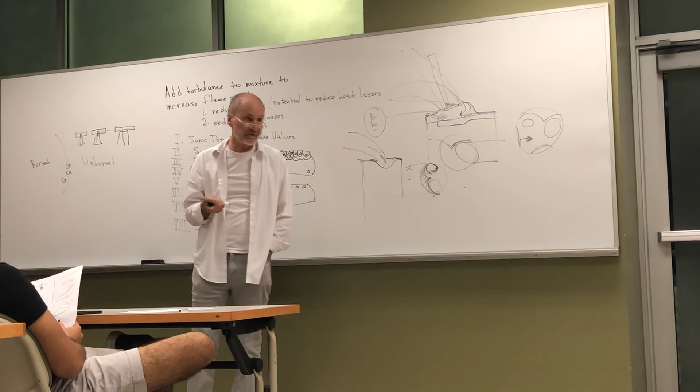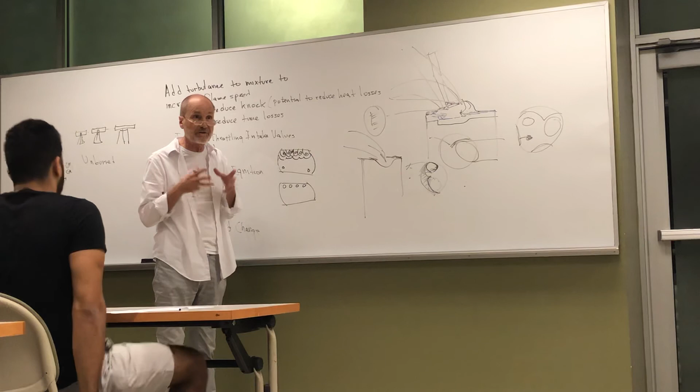And that's because, as I said, when the plug fires, you raise the temperature of those gases well above whatever combustion would take place, and that original flame kernel grows because of the high temperature gases trying to expand, and that creates turbulence at the wall, which increases heat transfer. The difference between 6 here and 12, these overlapping flame fronts are not able to decrease the time losses enough to make up for the increase in heat losses that occur because we've ignited all of these and have these expanding original flame kernels.

Question? So what's the most common? Is it two? Pardon me? What's the most common? One is common. This is an investigation. Not all engines have one, but the most common is one because it's cheap.

And this is an investigation so that they would know, as they go to multiple spark plugs, what type of advantages can be had. Now, they've missed the principal advantage in terms of reduced unburned hydrocarbons, and we have an engine downstairs being designed with 4 spark plugs that should cut unburned hydrocarbons at least in half. They noted a decrease in unburned hydrocarbons, but they positioned the spark plugs such that they were nowhere near maximizing that advantage. And in the paper itself, they attributed the reduction in unburned hydrocarbons we see at the bottom of the page more to the time in the cycle in which the gas is burned than to the unburned hydrocarbons caused by the crevice volume between the piston and the cylinder wall.

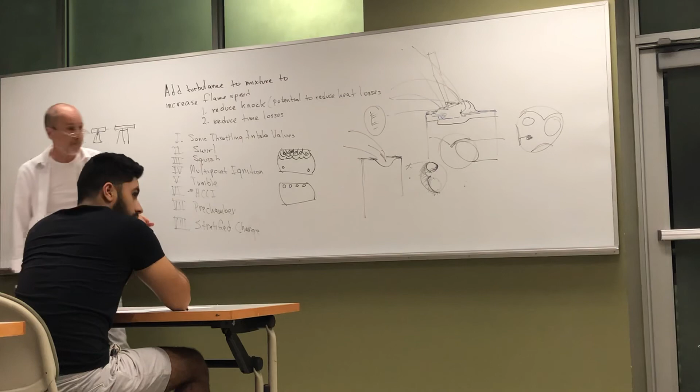Like I was saying, you already have less hydrocarbons with 6 than with 4, sorry. Yeah, why is that trend? Well, let's go ahead and go down the page so we're not missing a lot of stuff.

If we look at the second figure on the left-hand side down, we note that as we get very, very lean, all of a sudden, the best efficiency spark advance doesn't increase. You see how the figures go like this, and then they flatten out? Yes. Particularly with 1 spark plug? Is this figure A? Well, what's happening here? Yeah, well, or figure C, depending on, you know, if we call that figure A, then there is no figure letter for the one at the top. Oh, so E. Okay. But I think we're all looking at the same figure, and that's what counts.

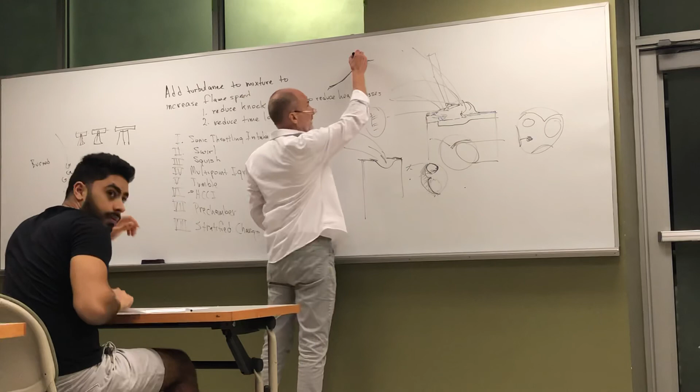If you look at the spark advance, particularly if a 1 spark plug goes like this, then it flattens out. This is best efficiency spark advance versus fuel-air ratio. We leaned it out, the inherent flame speed went down, but it didn't like more spark advance. I'm not seeing this one. What's happening here is we're avoiding not being able to light the ignition at all. I'm not seeing this flat.

See, as we go to here, we go to lower and lower temperatures and pressure at ignition. And we reach a point in which, if we chose the optimum spark timing, the temperature and pressure at the point of ignition is so low it wouldn't ignite at all. So you reach a point where you can't go far. You can lean the engine out more, but you're not going to add more spark, even though the engine would be more efficient if you could. But you're adding that additional spark advance. That means you're trying to ignite a cooler, lower pressure mixture, and it won't ignite. So the flattening of those, particularly for the single plug type of operation, gets a little bigger, a little better as we go to more multi-plug operation.

But we've already discussed why the 12-plug combustion chamber doesn't deliver as good efficiency as the 6-plug at the lean mixtures. And so if we look at just to the right, we can see the stability. That's a function of how repeatable each cycle in a given cylinder is. If every time that cylinder fires we get exactly the same behavior, then there's no fluctuation in torque. But if it changes, we can measure the fluctuation in torque, and that's what's shown here. And as we get leaner, the torque fluctuation increases. With a single plug, it increases rapidly, and of course, that means the cycle-to-cycle variation is larger. If we drew the PV diagrams, one cycle would not look like the next one at all. And this could be improved even as we go all the way out to the 12-plug operation. And that inherently is going to give us a better thermal efficiency.

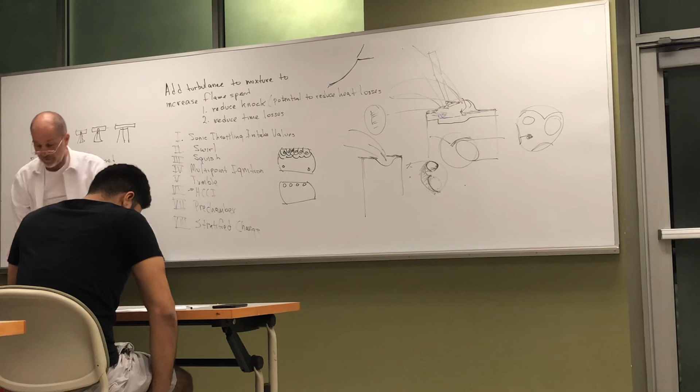What's shown in the figures that are third down from the top, both on the left and right hand side, is a comparison with 1 plug and with 2 different geometries for 6 plugs. And clearly, the 2 different geometries for the 6 plugs are to either put all 6 plugs on one side of the chamber, or spread them out like this, and of course, this gives much better thermal efficiency.

Because here, these flame fronts overlap very early in the cycle, and we can see the actual flame front area as you look at the figure on the right-hand side. By the time you've burned half the mixture, the flame front area is the same with either 1 plug or all 6. So the only advantage in terms of enhanced combustion, in terms of the rate of combustion, with the 6 plug occurs in the first half of the cycle, is small.

On the other hand, in this case, when the flame fronts have grown this big, they're still not overlapping. So the total flame front area is all of this area. Okay? And this continues until eventually they do overlap. And you can see then that we can go to a much leaner mixture with the 6 plugs laid out like this. And the efficiency is going to be higher.

Are there no lean limits of combustion in these? They're not shown, you'd have to take them off the previous figure. But why is it so much leaner with these than the previous? Well, this is an entirely different engine than previously. And the load conditions are different. This is already under a higher load. And the more power you're taking out of the engine, the easier it is to go to the leaner regimes.

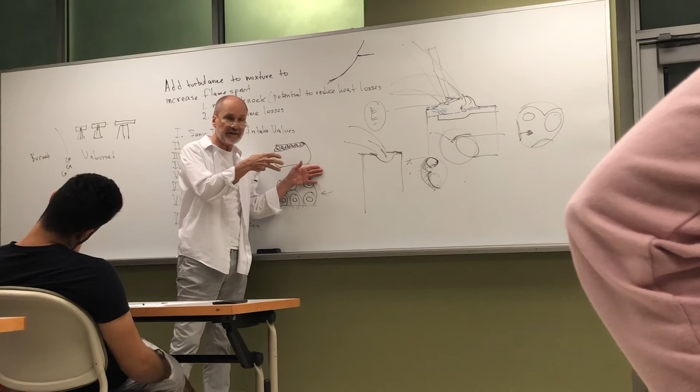The principal thing that is occurring here is when you're actually quenching the gases. As the gases burn closer and closer to the cylinder wall, the hot gases are transferring heat into the unburned gases, and the cylinder wall is transferring heat out of them. And eventually you get close enough so that the relatively cold cylinder wall is cooling these gases to the extent that you can't burn them, and they're quenched. Quenched means we don't burn them.

And so if you quench them early in the cycle, this same volume of gases, and actually early in the cycle, the quench distance is a little bit larger, but not enough to make up for the fact that the gases here are in much lower concentration than they are late in the cycle. So the quench that occurs late in the cycle, after the flame front has traveled across the combustion chamber, is going to produce more unburned hydrocarbons.

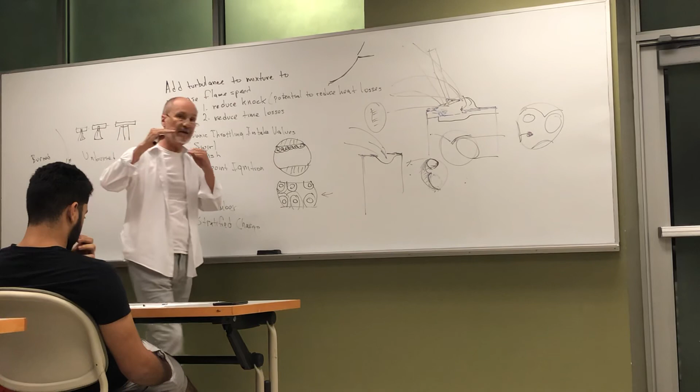So all of these are 0 squish, right? Because you can't have any squish with 6 spark plugs like that. No, they did. This is all squish here. That makes sense. That plate goes in between the cylinder head and the cylinder block. The piston comes up to top dead center, and this is all squish. How much swirl, they're not even mentioning. Okay.

But the principal criteria here, the comparison, is the number of ignition sites. That's what they were worried about, and they chose to do it in this fashion. If they had done it without the squish, I think they would have had even more startling results. That's the engine we're building downstairs, one of the engines. That's the engine that General Motors is using.

So if you had 2 spark plugs and they were offset and you had it shrouded, could the flame kernels themselves create some swirl and turbulence just because you've got an unequal pressure? The flame kernel just expands basically as a sphere unless you have a huge amount of swirl, and then it's a sphere that's moving downstream with the swirl. So it's very difficult to try to create, with a combustion process, any sort of a bulk rotation. There's no way to push against something with a combustion process so that you could provide preferential gas motion.

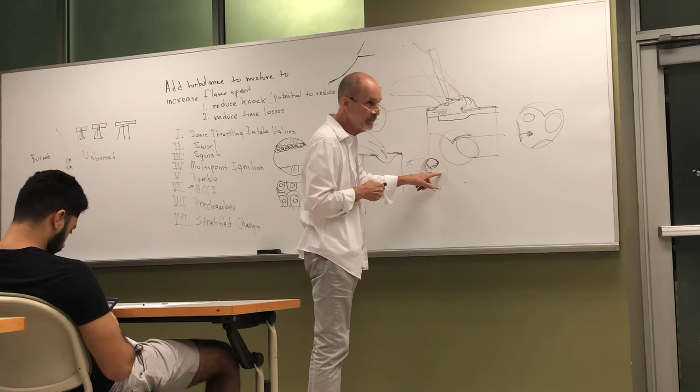Like if you would have your spark plug, let's say where this heart-shaped chamber, you would have your spark plug on where your intake valve is right now. The spark plug is typically usually there. But if your ignition were where your intake valve is, could the expansion of the gases push the other gases around and create more turbulence? I think that's kind of what he's asking. Not to any appreciable amount.

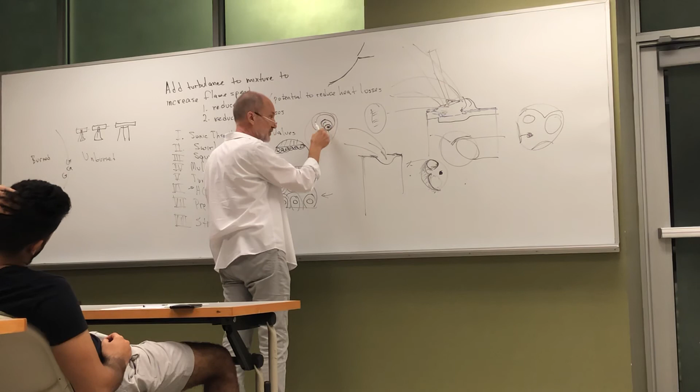Remember, this squish only exists at top dead center. As you begin to open it up again, this volume gets larger. You can't really create any appreciable amount of swirl during the combustion process. The swirl occurs beforehand, and then the combustion goes right along with it. In other words, if viewed from the top, we have a high swirl ratio, we have a spark plug here, the flame kernel can grow like this, and this side of it never progresses, because you're feeding in more air on this side, and the center of the sphere is just moving with whatever the rotational speed is.

But remember, you can't get pressure gradients with combustion. Unless it's knocking, the flame speed is not high enough, and the perturbation that creates the pressure rise travels throughout the entire combustion chamber far more rapidly than the flame speed. So when you do a PV diagram, if you don't have knock, it's a nice smooth curve. The only time you see this is when you do have pressure gradients, and at that point, you have knock, and you have to back off the boost.

Good? Dr. Swain, are you familiar with the Chrysler Crossfire and how it has multiple spark plugs? How does that work? Is it one of these configurations, or just one on each side? Chrysler's the one company that's been going to two spark plugs, and all that does is allow you to double the flame front area. The marketing can call it what they want, but fundamentally, you get all the advantages: you can burn the mixture more rapidly, you can go to higher compression ratio because you're less likely to knock, you can reduce the amount of coolant the engine needs, reduce the heat losses, all the inherent advantages you get from rapid burn.

Are spark plug geometries generally considered in surface-to-volume ratios, or is it ignored? The spark plug itself, the metal sticking out? You can add in that surface area, but it's small compared to the total surface area of the combustion chamber. If you cut the spark plug open, we have a center porcelain core to insulate it to make sure we don't get a spark jumping from the cylinder block. We want it to jump over to the ground electrode. We don't want it to jump inside here, we want it to jump outside here. The heat range only changes how far this porcelain goes toward the tip. As the porcelain is fabricated closer to the tip, you've got a colder spark plug, and as it's farther away, you've got a hotter spark plug. That's principally it. You can buy spark plugs that have three ground electrodes, but it's very debatable. The manufacturer will say wonderful things.